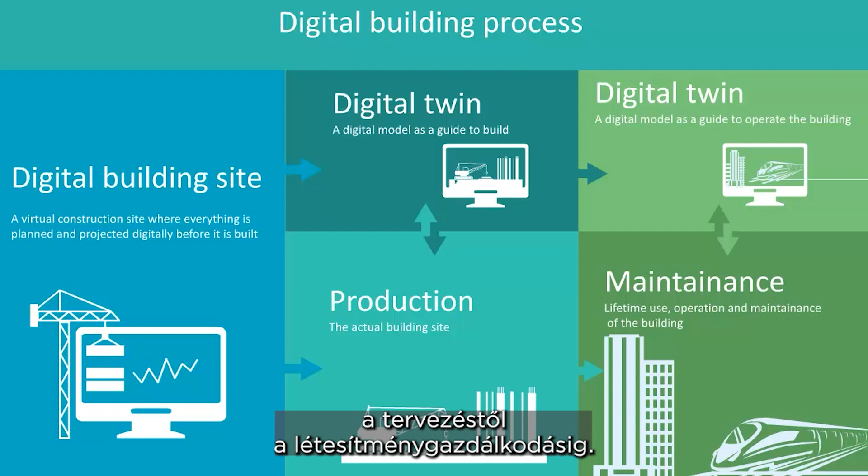This roadmap is a strategy for total digitalization of the Norwegian construction and building industry. All large companies in Norway joined in and developed this roadmap together. They developed the slogan, "We will only succeed if we digitize together." The main focus is to maintain a digital twin throughout the building process, from design to facility management. Building Smart standards are essential to make this work.

How we consider a product depends on what part of the life cycle phase we are looking at. In this proof of concept, we will take a closer look at the part where we select and order a specific product based on the open standards IFC, BSDD, and the NEB supply material.

The proof of concept is based on an IFC file for the building we are going to build, and the product we are going to focus on is the window marked as green on the left side of the slide. There are only a few properties attached to the window: overall height, overall width, and thermal transmittance. These are requirements that all have to fit when we search for a window.

Based on these properties, we will search the Norwegian product database, filter on values, and select a suitable window. Furthermore, we will order this window and receive details about the delivery status.

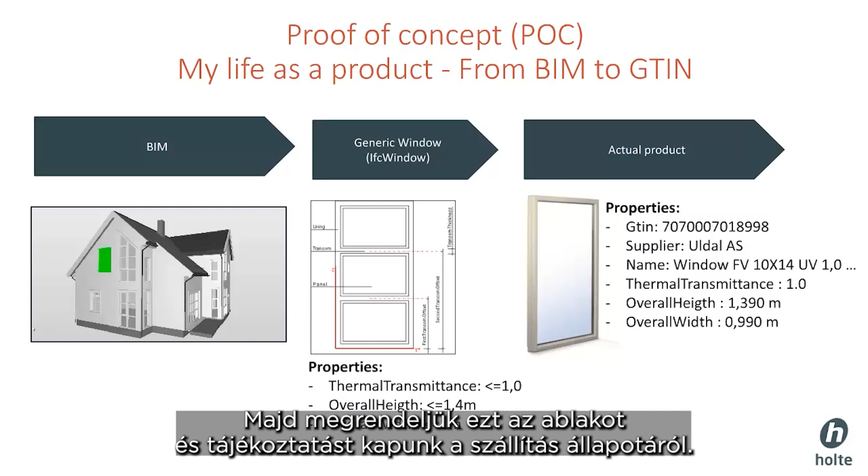In order to achieve the goals of this proof of concept, we were reliant on collaborating with several actors and open standards enthusiasts. We use standards developed and maintained by GS1. These are GTIN to identify a unique product and GLN to identify a unique supplier. We also use the industry-owned NEB supply material format to communicate details for the product throughout the ordering process.

Norsk Byggtjeneste has done a huge effort to add BSDD properties to the Norwegian product database. We use this to search and filter products based on BSDD properties. Holte has a database with elements containing product and time estimates. We map these elements to the IFC objects to get a rich model with product cost and hour cost for cost calculation. Both Building Smart and Catenda have also contributed with knowledge and the BIMsync viewer.

Holte is a software company from Norway with 140 employees. We produce software for the building and construction industry and have been in the business for more than 40 years, and today we have more than 40,000 users on our software.

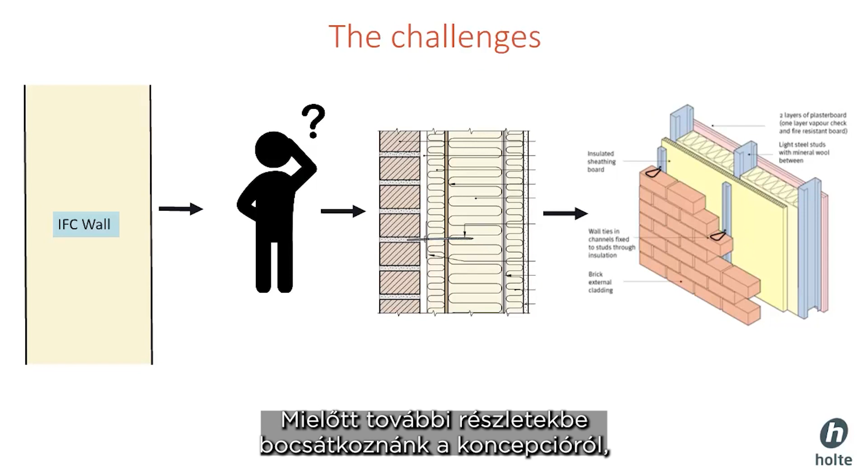Before we go into further details about the proof of concept, it is important to get a deeper understanding about the information we get from the BIM. There is a challenge today with most IFC files: they contain little or no information at all about the layers in the IFC objects. Usually the IFC wall looks like this, more or less empty. Most often we get the amount of the wall, but the layer sets are empty or incomplete.

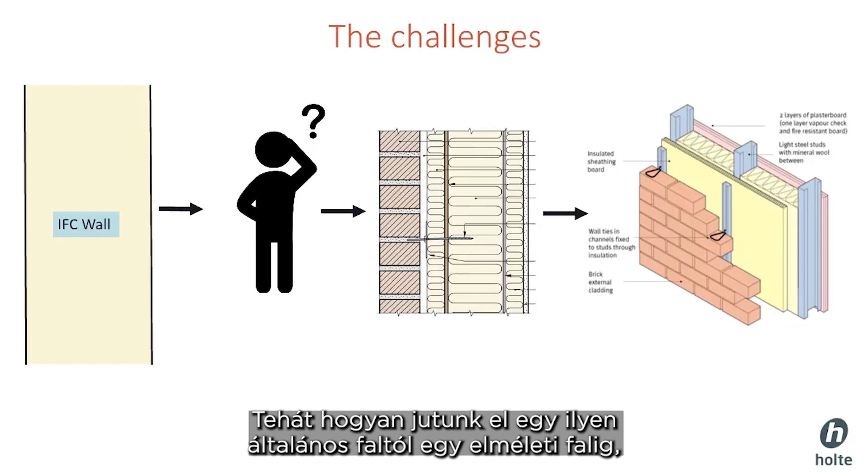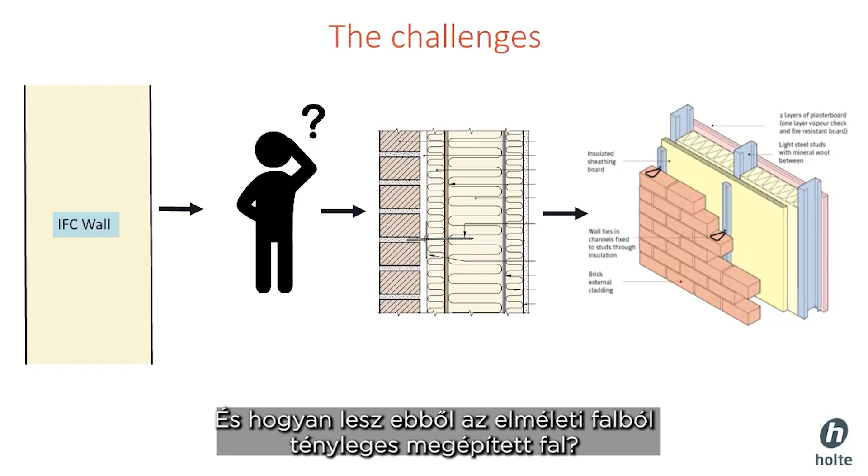So how do we get from a generic wall like this to a theoretical wall with layers, products, and hour consumptions to produce the wall? This is information we need to be able to cost calculate the wall. And how do we get from a theoretical wall to the final built wall?

Holte develops and maintains a large database with all the typical walls used in Norway. When we import an IFC file, we have mapped all the walls and objects used in CAD software to the walls in our database. That way, it only takes seconds from when we start the import of IFC until we have an almost complete cost calculation, with both a complete list of products and all the hours it takes to build it.

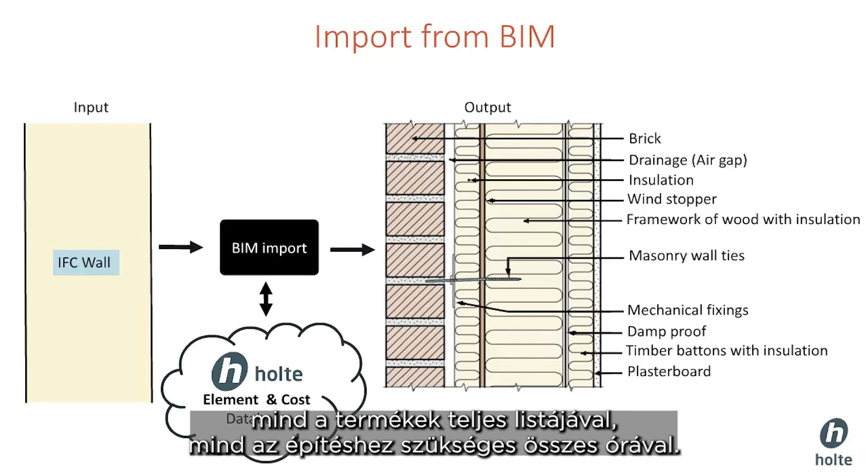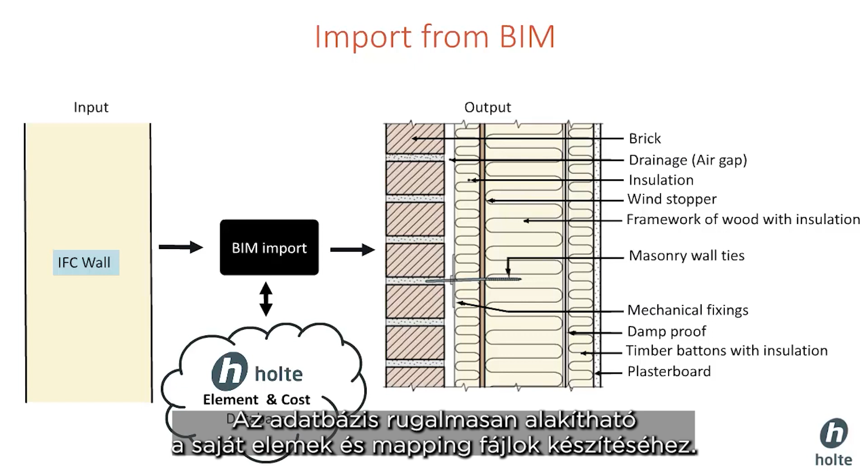Norgeshus demonstrated this at the Building Smart Summit in London. They managed to automate 90% of the cost calculation by using the tool Holte SmartCalc. The database is completely flexible to make your own elements and mapping files.

In this proof of concept, we will not use the window from our database. We will instead search for the window based on its properties.

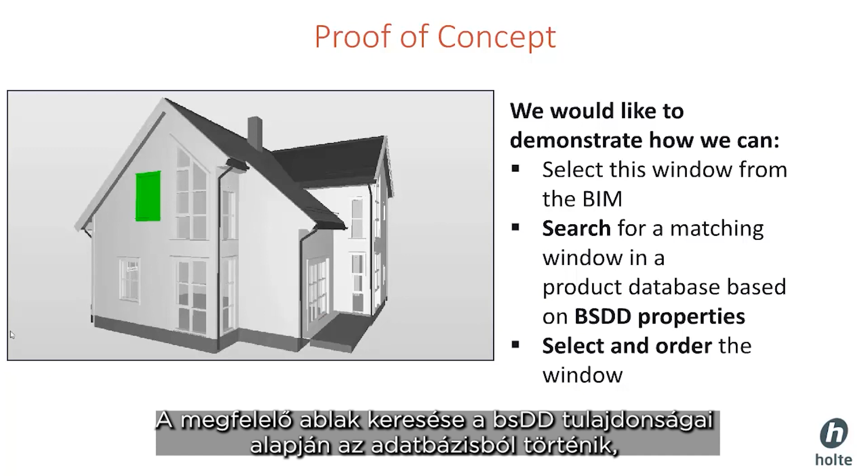And now it's time to demonstrate how we can select this window from the BIM, search for a matching window in a product database based on BSDD properties, and select and order the window.

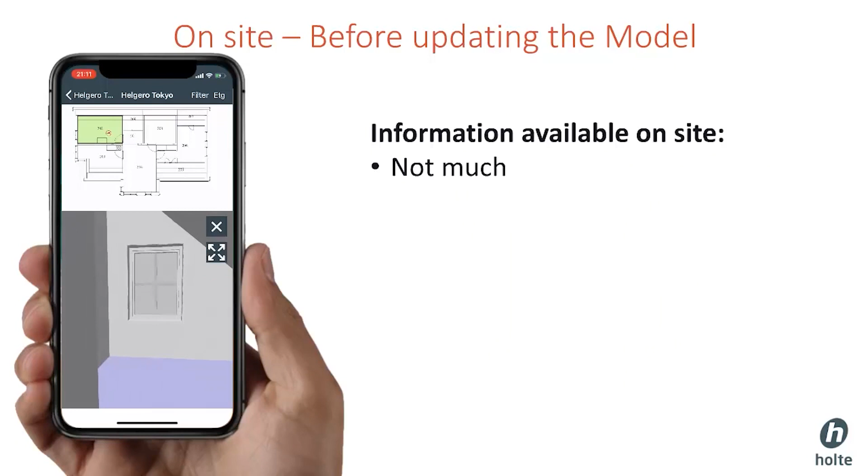Before we start the process, let's take a look at the IFC file. This is the information available on site from a standard BIM that we usually get from actors in Norway. We know that some are better, but today this is often the quality of what we get. Not much to buy a window from.

So we start by creating a project. And once the project is in place, we create a calculation based on an IFC file. SmartCalc has predefined templates to connect different CAD tools with Holte's element and cost database. The customer can create custom templates to suit the way they build.

And once SmartCalc finishes the job, you can quality assure the import. In the menu bar, you have full control over the objects that are automatically mapped with your favorite element. You can also make mappings based on IFC space for interior surface. If you are happy with your choices, create the calculation.

With a good template in place, it only takes about 30 seconds until you have a 90% finished calculation. What is not included in the calculation are those objects that are not included in the model, such as finance.

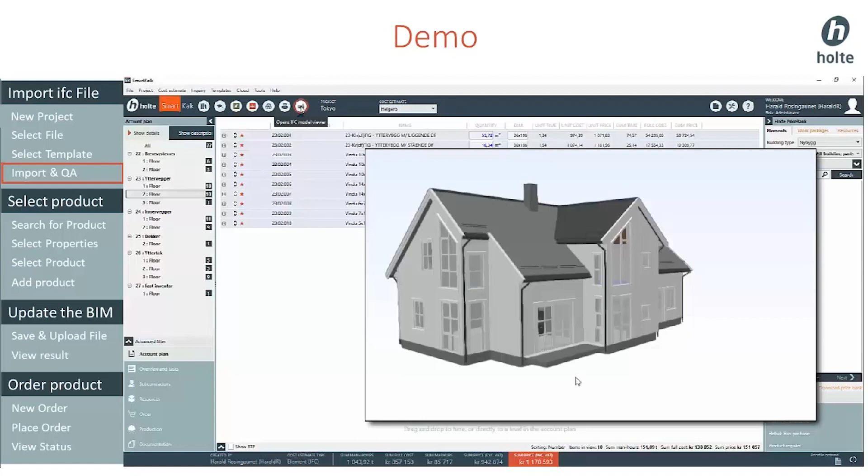In SmartCalc, you can now click either in the calculation or in the model to see the elements you are working on. And when we select the window element, it consists of all the items needed to mount the window in the building. The window is still a generic window with basic information from the model.

So we will now replace the generic window with a real product, and we use the properties we have for the product to find the perfect match.

Without using any of the properties in the search criteria, we get over 200,000 windows to choose from. By filtering the search with height and width, the results are narrowed down to 65.

We add swing direction and get 39 hits. And finally, we add thermal transmittance and get 4 hits.

We choose one of the windows and use it in the calculation. Now we have a window with a GTIN number and are ready to order the product.

When we are finished with the cost calculation, we want to write the product back to the model. So we upload the file to Catenda's BIMsync to see how the data is represented.

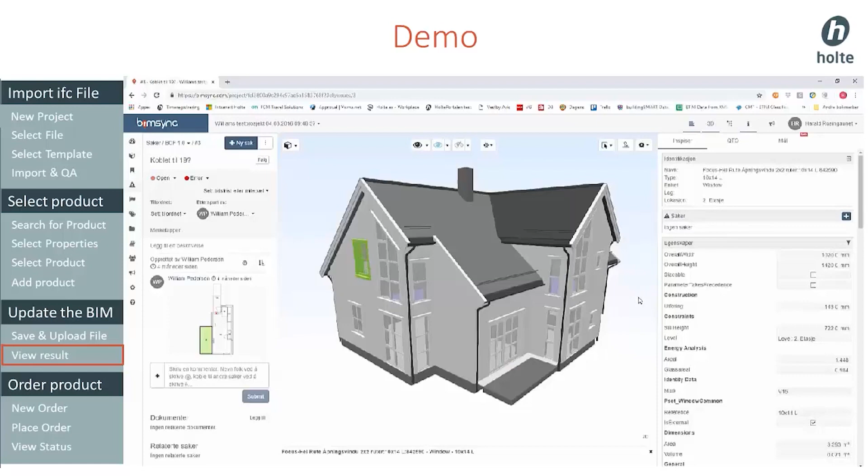After the calculation is done, we are ready to order the materials we need. First, we create a new order. We then add the supplier we want to use. The selected supplier has a GLN number. Finally, we add the delivery details.

You can use the calculation to order the material for each building phase, and you can easily split up the ordering based on the progress plan for the project.

And now the materials are ready to order. The order will be sent electronically to the supplier, and the ERP system checks and returns order confirmation, all based on open standards.

Afterwards, we can view the order status for each product in the order. We get information if a product has been cancelled and replaced with a replacement product. We are also informed if a product gets a different price than we had in the calculation.

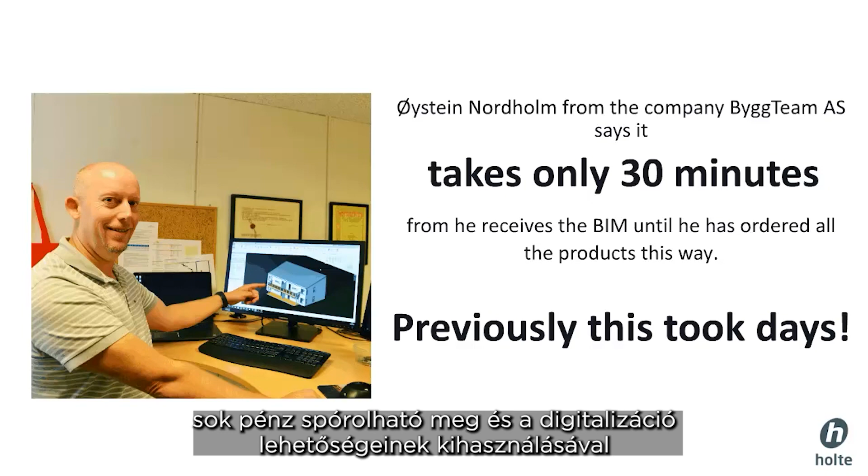This is an example from Norway. Byggteam is a Norwegian company that built houses similar to the one in the proof of concept. He says it only takes 30 minutes from when he receives a BIM until he has ordered all the products. This was something he used to spend days on. This proves that even if this is a relatively small house, he saves lots of money and gets more efficient

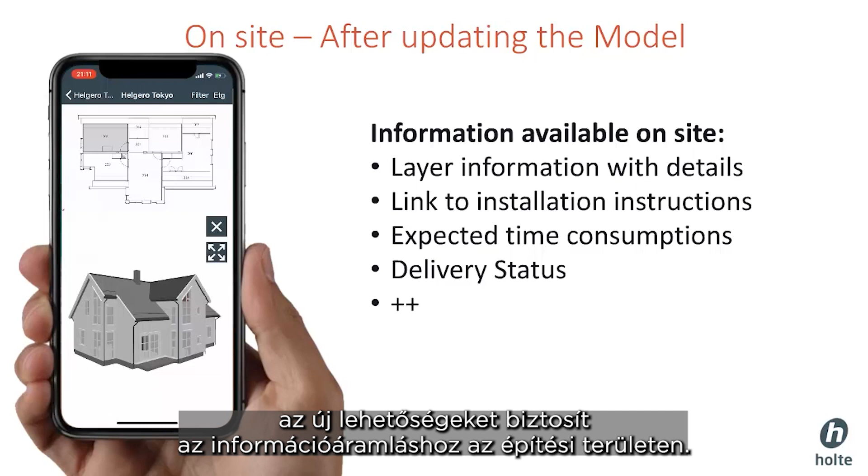by using the potential of digitalization. When the goods are ordered, origin from an IFC object in a BIM, it gives new opportunities for information flow to the construction site. As the video shows, a lot of information on the BIM object has occurred since the IFC object we started with.

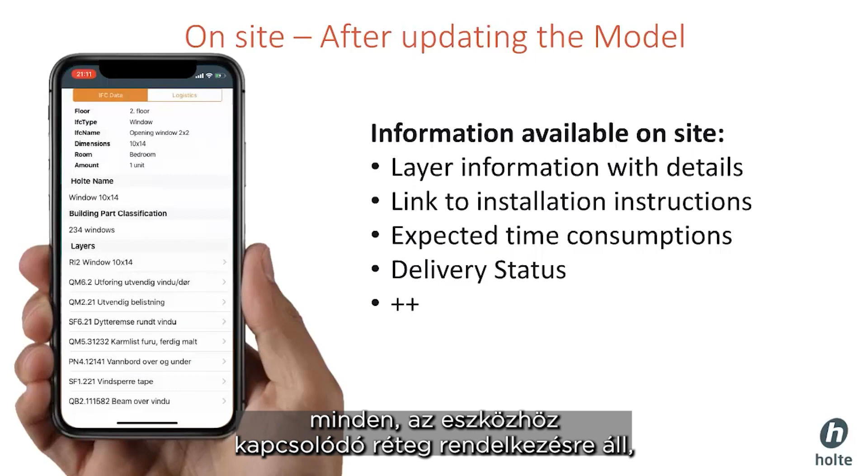We've got all the layers belonging to the item, with the ability to show which product belongs to each layer. And when this is in place, we can show material price, assembly time, and information from the Norwegian building database, such as assembly instructions and much more.

In addition, we have a complete overview of the logistic information on all products in relation to whether they are at the site or if ordered yet. If a replacement product is delivered, this information is also available. This information can then update the model so that we will have an as-built digital twin.